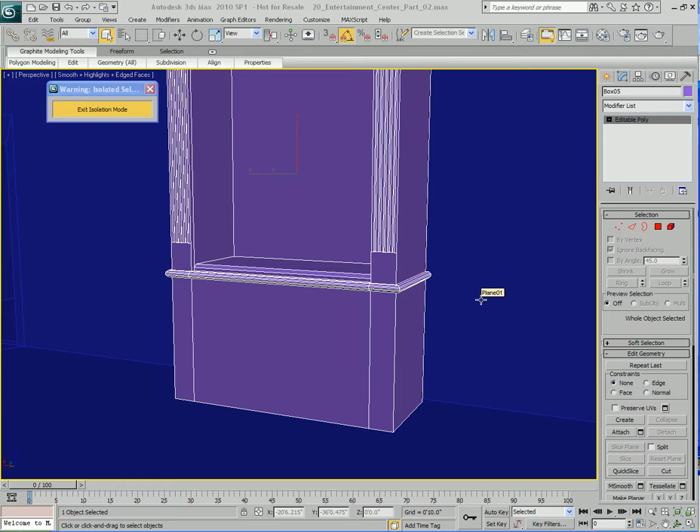Alright, so we're back over here. Let me show you what we're going to do. We're going to work on the bottom part right here. If I zoom into the image, we need to basically create this bottom section, these details in the wood, these panels over here on the sides, and this bottom section that's right here you can see in the image. So let me go ahead and start to do that.

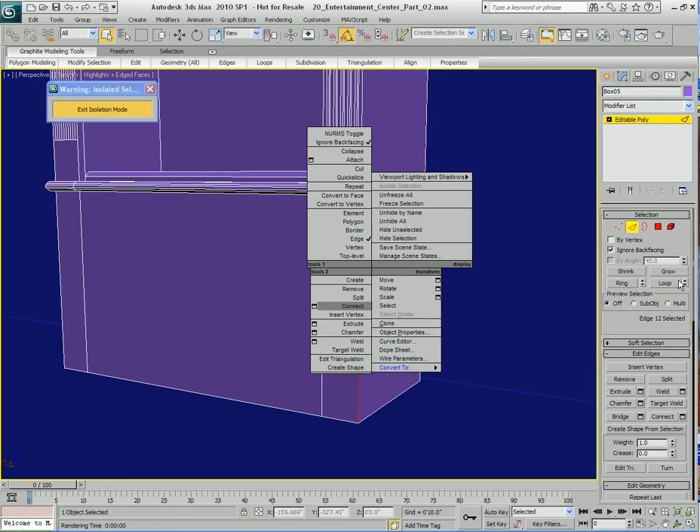I'm going to go to edge mode. I'm going to select this edge here. I'm going to go ahead and select the ring all the way around, and I'm going to connect this one time. I'm going to move this down. Now I know the bottom is at 0 in the z-axis. So if I go ahead and look at my transform tool here, I'm going to go ahead and place this at about 6 inches. And the reason I'm doing that is, let me show you why.

If I look at the image, I have this bottom section right here. See this bottom board, the baseboard sort of piece there that goes in the bottom of the furniture. That looks like it's about 6 inches in height, so I'm going to go with about 6 inches for that. Okay.

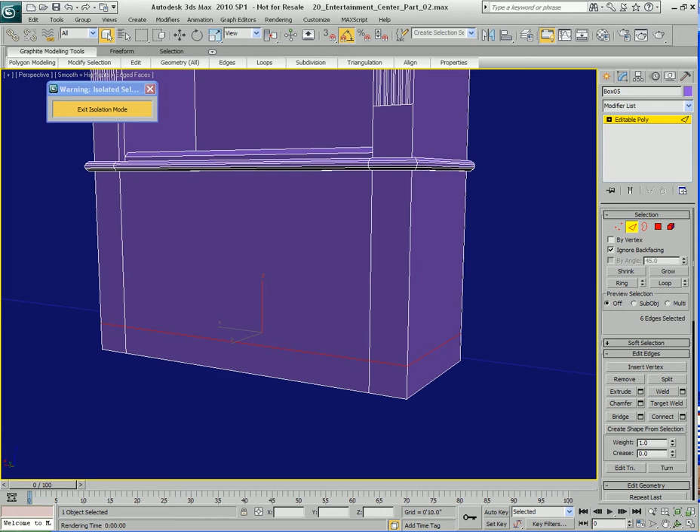Next thing I'm going to do is I'm going to select these two polygons and these two polygons on the other side. I'm going to use the extrude tool, and I'm going to extrude that out about 1 inch on the local normal and hit OK. Now the same problem happened as before. If I go to the top view and look at this very quickly, you can see that there's an angle there. It didn't extrude it properly.

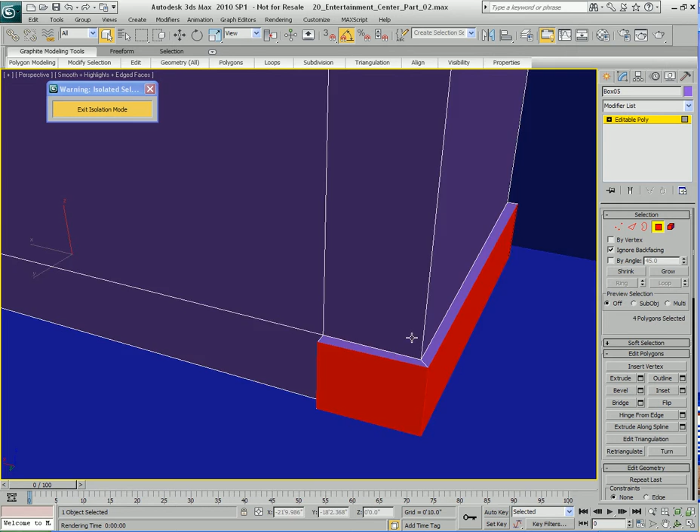Okay, so what I'm going to do here is pretty simple. You probably guessed it. I'm going to select that polygon, go to the align tool, and align that in the X. I'm going to take this one and this one in the front, align that in the Y, take that one and align him in the X, and those are good to go.

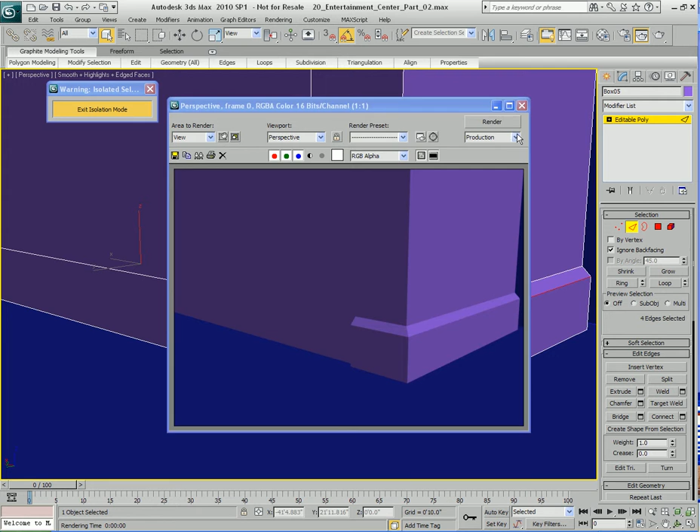Okay. Next thing I'm going to do is I'm going to select that edge and that edge right there on top of those little pieces that I created. Okay. And what I'm going to do is I'm just going to take those edges and move them down a little bit like this, just to add a little bit of detail right there. See that? Looks pretty good when it gets rendered out. Okay. Right. Now with that done, let's go ahead and create the details that we need to create here.

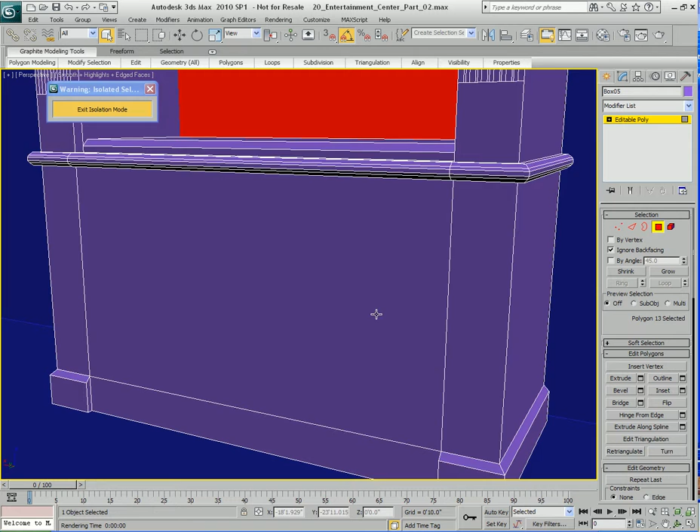So let me go to polygon mode and select these two polygons right there. And what I'm going to do here is I'm going to try to create these details right here on the side panels of the little column piece. So the way that we're going to do this is pretty simple. I'm going to use the bevel tool here. I'm going to bevel it out to about this much, just a little bit, just eyeball it, that's perfectly fine. And the outline amount is pretty good. I'm pretty happy with that. I'm going to hit OK.

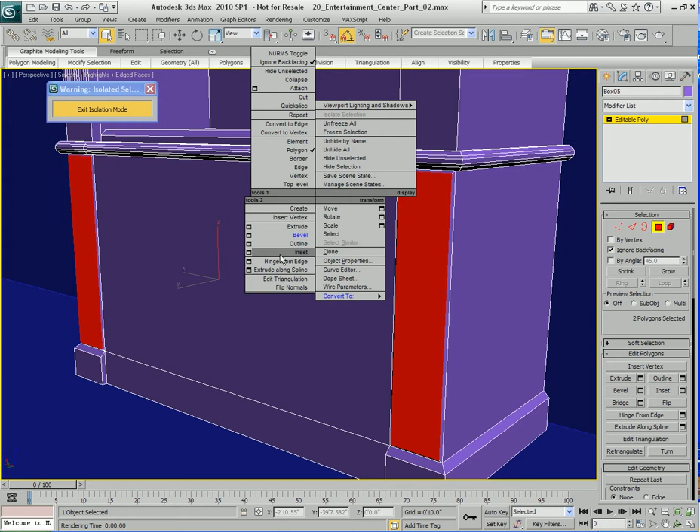With those polygons still selected, I'm going to continue to use different tools. I'm going to be using extrude, bevel, and inset. So now I'm going to use the inset tool, and I'm going to inset that a little bit like this. I'm just eyeballing it to something that looks pretty good, and that looks pretty good to me. So I'm going to hit OK. I'm going to use the bevel tool again. This time I'm going to bevel into the geometry a bit, like so. Okay, I'll hit OK. I'm going to go ahead and inset again to about maybe this much.

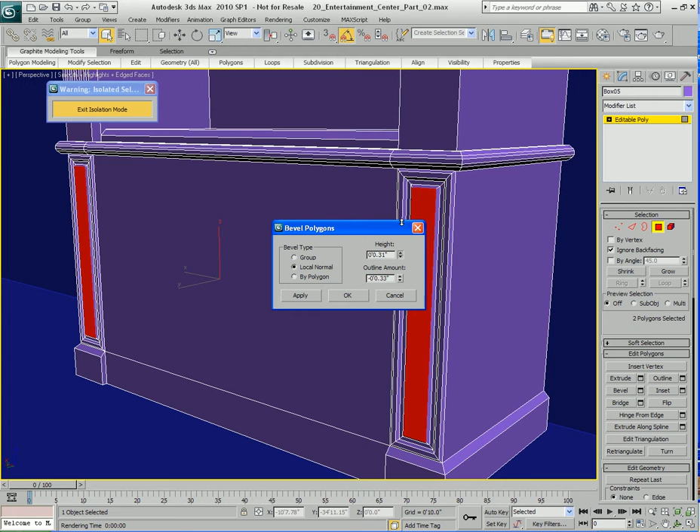Looks pretty good. Okay, I'll hit OK. I'm going to go ahead and bevel again. This time I'm going to pull the bevel outward like this and hit OK. I'm going to look at this object here. Maybe push those. Now I'm just being really picky, so I'm just going to leave that alone, or else I'll sit there wasting a lot of time. So if I render that out, that's what I end up with, which looks pretty cool.

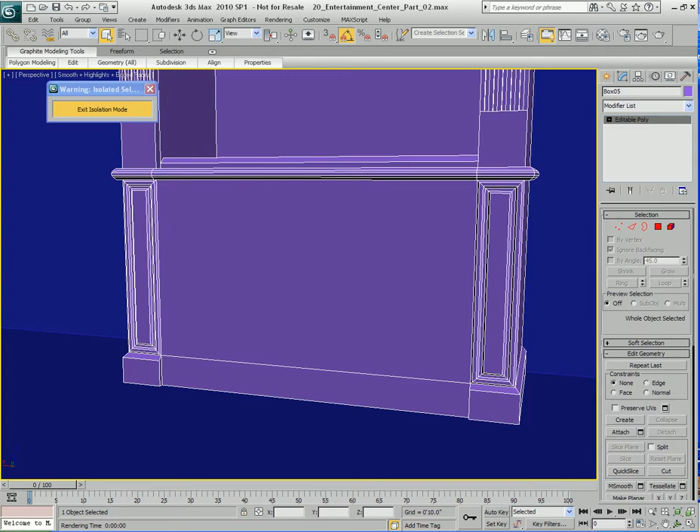Okay, next thing I'm going to do is a similar thing over here, because if I look at the image, we also have a similar type pattern. It's a little bit different, but it's similar right here in the middle. We have these two panels right here in the center. Okay, so let's go ahead and create that. So how can we do that?

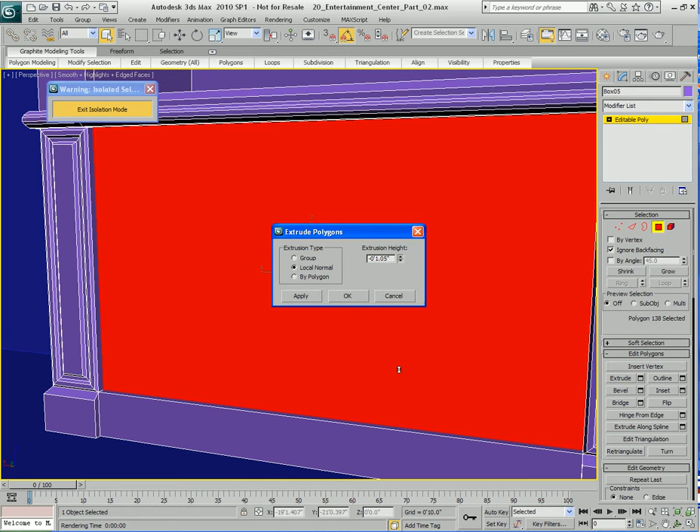Well, I'm going to take this polygon that's right here in the middle, and I'm just going to take the extrude tool here, and I'm going to extrude it into the geometry about maybe an inch, something like that, maybe a little bit more, and I'll hit OK. All right. Now go to edge mode and I'll select this bottom edge from the new area that I just created, and the top edge right there. Okay. And I'm going to connect that one time straight down the middle and hit OK.

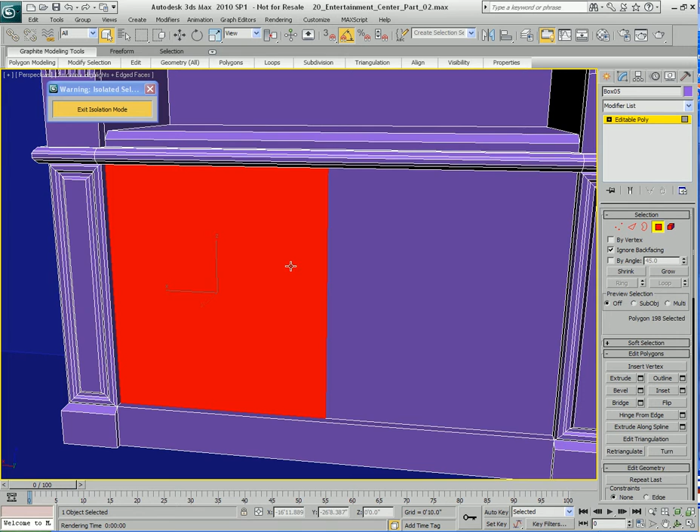Now I'm going to go to polygon mode and make sure both of these polygons are selected. And with these polygons selected, I'm going to go to the inset tool. And I'm going to make sure that I do not inset by group. I'm going to inset by polygon so it makes them separate. See that? Now I'm going to inset a little bit more, something closer to an inch. Okay. I'm going to hit OK.

Now with these polygons selected, I'm just going to use the bevel tool, and I'm going to use the same technique that I used previously to create basically these details here. So I'll bevel this out, hit OK. Maybe I'll use the inset tool, inset that a bit, maybe about an inch, something like that. Hit OK. Maybe I'll use the bevel tool again. This time I'll bevel it inside, like so. Hit OK.

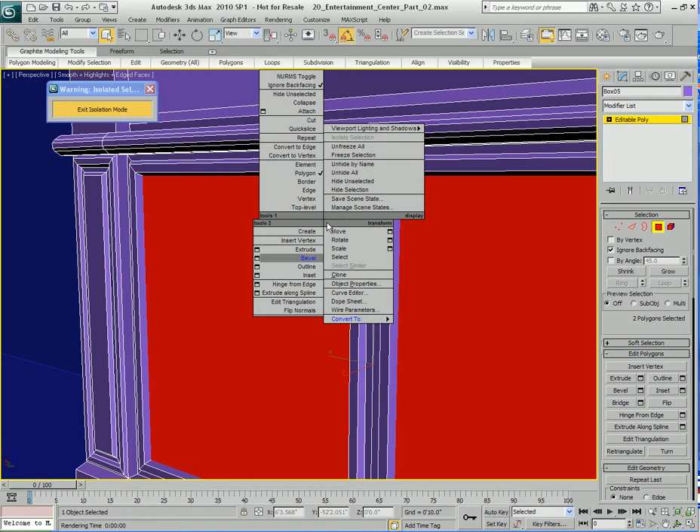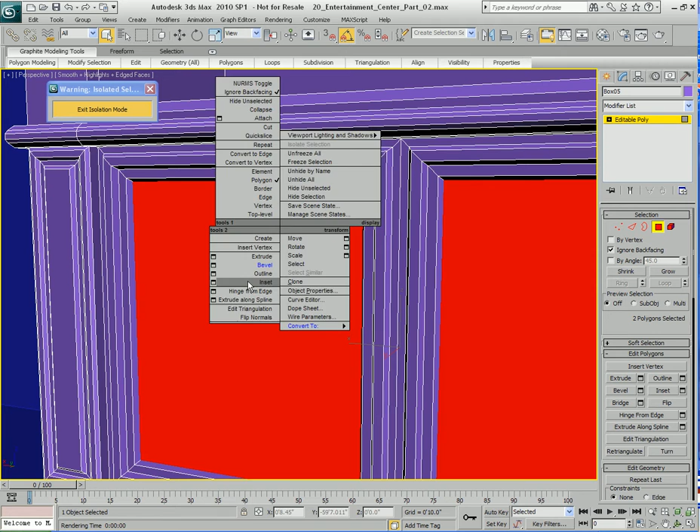Maybe I'll inset again. About this much is fine. Maybe this time I will bevel again. Maybe inward. Inward looks pretty good actually. I like that. I'll hit OK. Now maybe I'll use the inset tool. We go to the inset options. Inset that guy one more time.

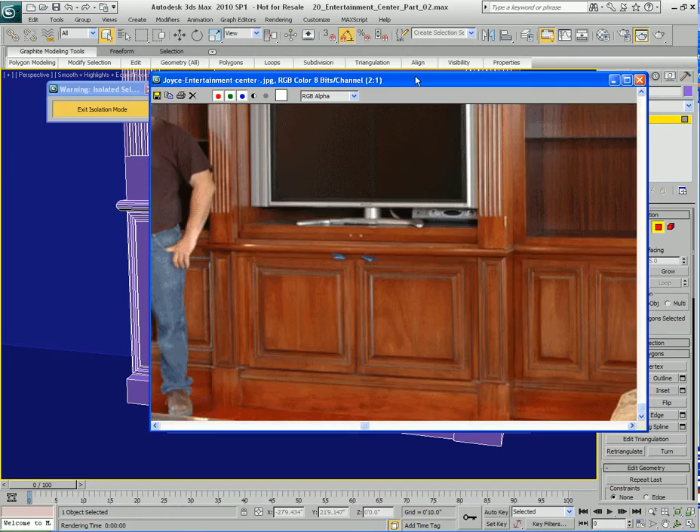Hit OK. And then maybe I'll use the bevel tool one last time and pull it outward, like so. Maybe give it more of an outline amount. Hit OK. Render that out. And that's what I've got. Looks pretty good. Looks pretty similar to the image. Again, the image is there as a rough reference. We're not trying to do everything exactly as the image.

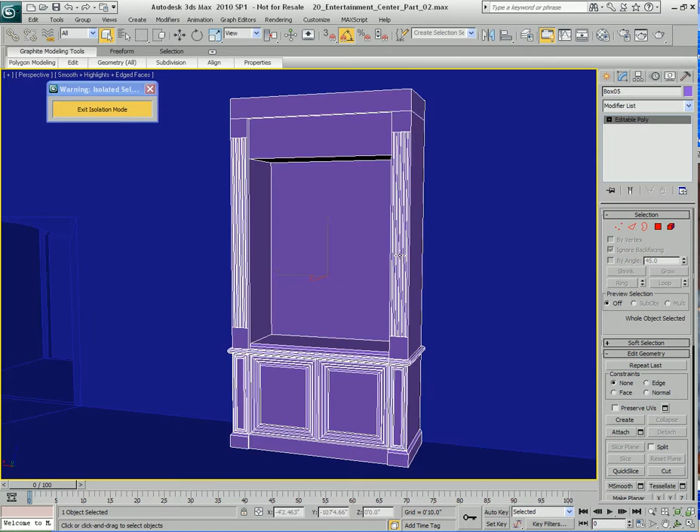Okay, so that looks pretty good. So that bottom detail, I'm going to say, is pretty much done. All right, so I'm happy with it so far. Let's go ahead and work on the moldings up here. But you know what? I think I'm going to leave the moldings for the next video. I'm going to look at my image here real quick and see if there's any other details here that I may have missed. And looks pretty good.

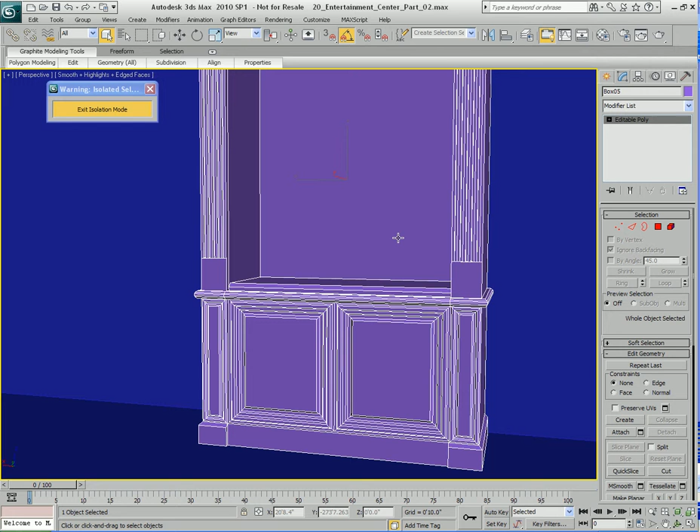I got the bottom done. I got this part done. The little divider piece down here done. I got these side column things done. This area is pretty much complete. Of course, we haven't done the shelves. We'll do that later. Pretty much what I'm going to work on next is the moldings up there. So I'm going to go ahead and save this out. Make sure you're saving your work, by the way, as you follow along. And in the next video, we'll continue working on this. We're going to focus on the moldings up here.